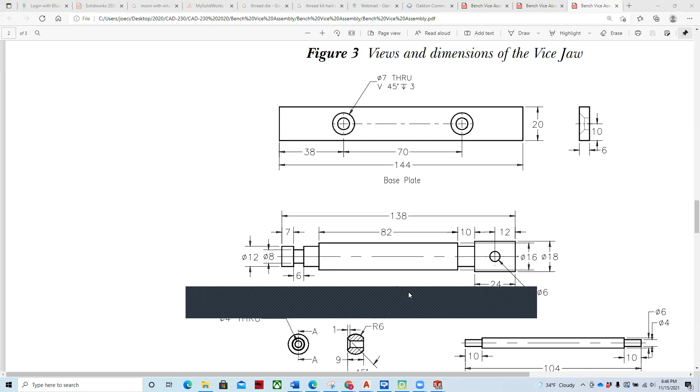Hi, Joe Cerrone, and today we're going to model this jaw screw for our mechanical vice assembly for the bench vice. All right, so as we look at this part, what we're going to do is...

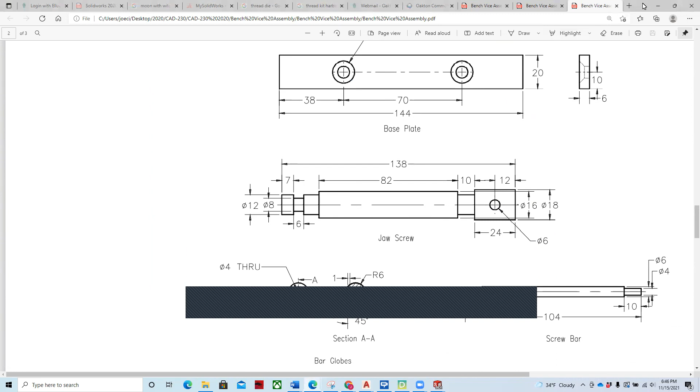We're going to take and create a new part drawing. We're going to use millimeters, and we're going to start by drawing the profile of this shape. So to get started, we're going to go into SolidWorks.

I'm going to start a new part drawing, and I'll say OK to that. I like to change the background so that it's plain white. Then I'm going to start on the front plane, creating a sketch of the profile of this component right here.

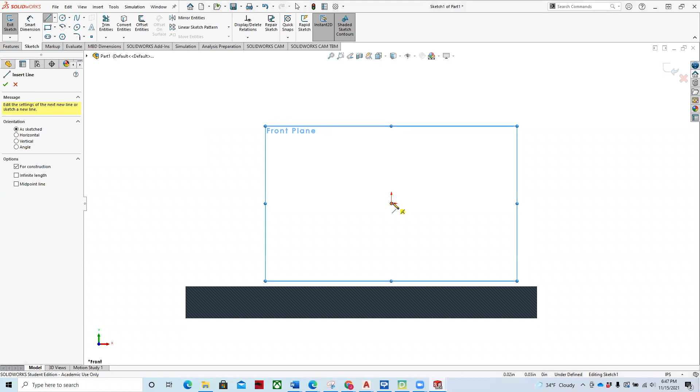I think I'll set it up so that I'll draw a center line from this point right here and bring that out. Before I get started, let's make sure the units are properly set, so we want millimeters. Then let's do that again.

Start a sketch, center line. As we bring that out, we'll bring that out to about 140. Close enough. Then as we start to work on creating the shape of this, there's a couple different ways. We could use the cake method, where we stack cylinders up, or we can just draw the profile of it and revolve it.

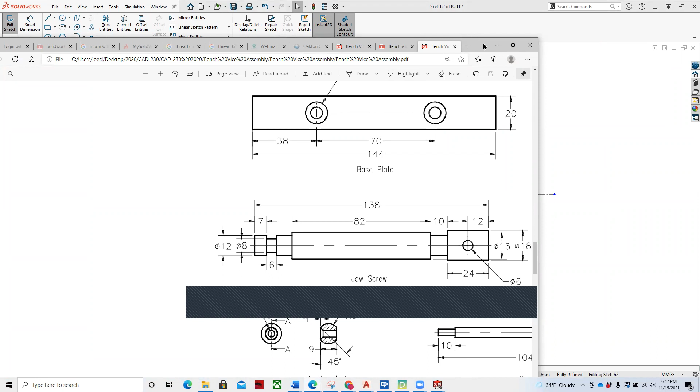I'm going to just draw the profile of it and revolve it. So we'll start off by drawing the basic shape. We'll come up here and bring this up - this is going to be about 6. Then we'll bring this over, bring this down, zoom in a little bit. This one's going to be even with that.

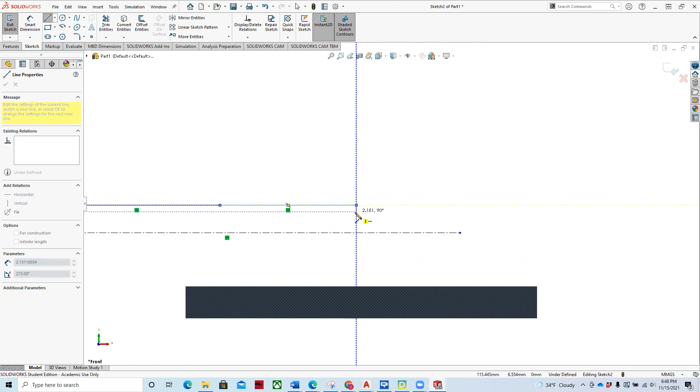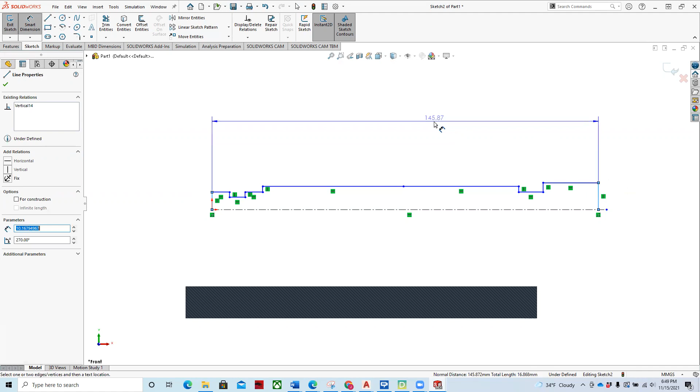Once we have our basic shape created, we're going to start to add some dimensions to that using smart dimensions. We'll start off by making the overall 138, so we'll come over here and here. Then we'll add the other components.

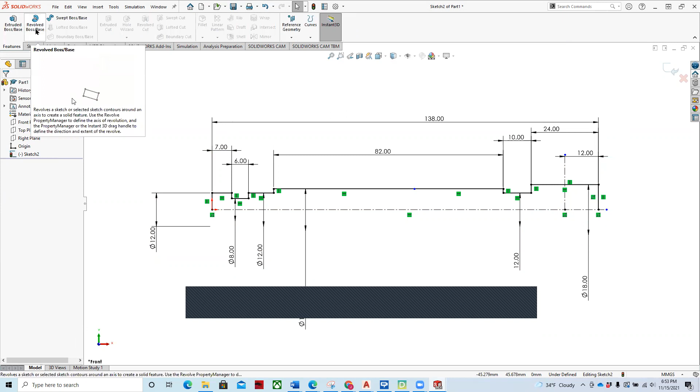All right, so we're fully defined, we have our components there. I also like to put a little holding place in here for where the hole is going to be, so I'm going to locate that 12 millimeters with a smart dimension from the edge, so I'll be able to use that component to grab onto to create the hole geometry.

Next thing we're going to do is revolve this. We'll go to features, revolve, say yes, and then we'll say our axis is going to be right here. Green check mark that. So here's our basic shape for that.

Then if we want to, we can go and sketch on the top plane, spacebar, normal to, and then create center mark, and we can create that circular geometry on that. We'll make that a 6 millimeter diameter. Green check mark that, locate that.

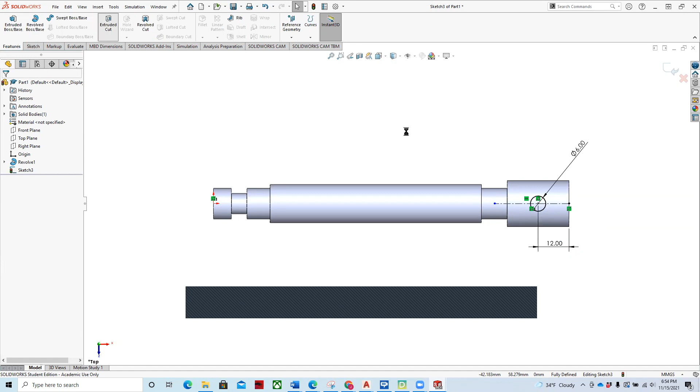I meant to do that from the sketch, but it didn't quite work out, so we'll just go through and do it this way. That's going to be 12. Then we'll extrude cut, through all both, and we'll green check mark that.

As we look at the component itself, what we can do is add threads to this using the threading tool. We're going to set that up with the threading aspect of M16 by 1.5. So we'll come back here - let's save it in case it explodes on us.

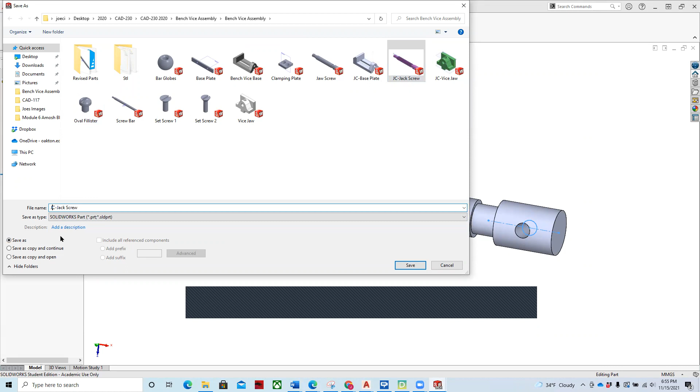We've got most of our modeling work done. I'm going to save it as - now I have my middle initial as I do these more than once. Save it. All right, so to go through and add the threads to it, let's make it a little bit more interesting - let's put a little color on it.

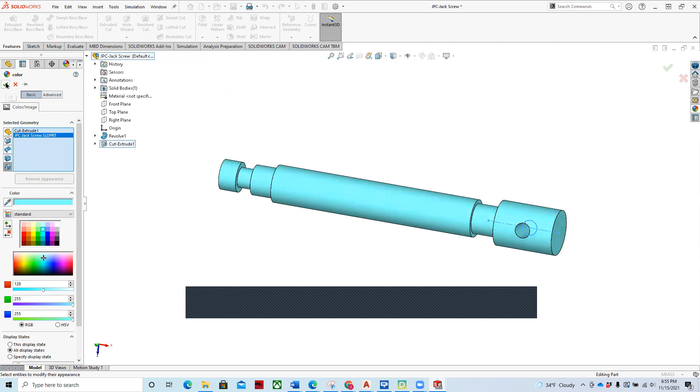I think we'll make it light blue. Then as we work with the threading tool, we're going to go under the hole wizard and say thread. It did explode on me last time, so hopefully it will work for me this time.

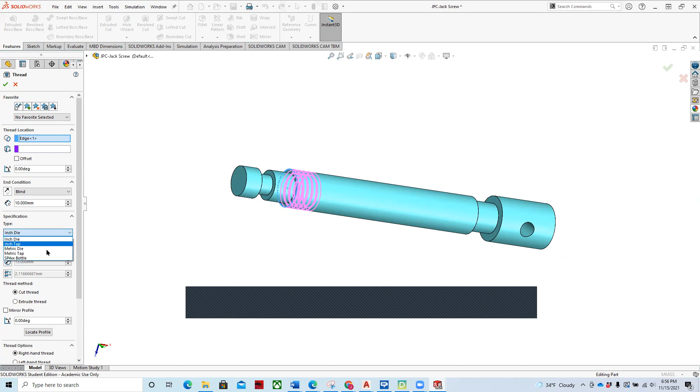Then what I'm going to do is select the edge of it right here, and I'm going to set that up as a metric die. So I'll say metric die, and then I'm going to say...

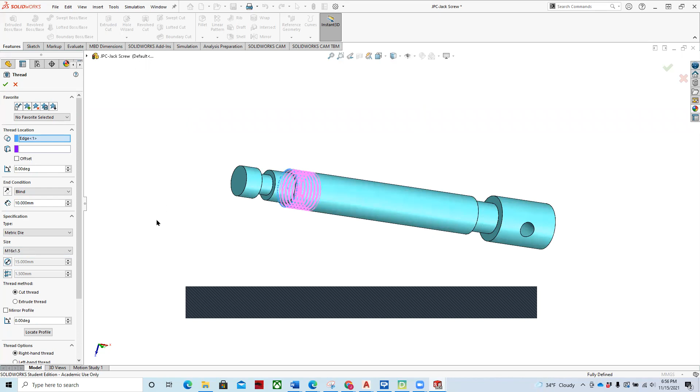M1.6... and M16, 1.5. There we go, so there's our thread.

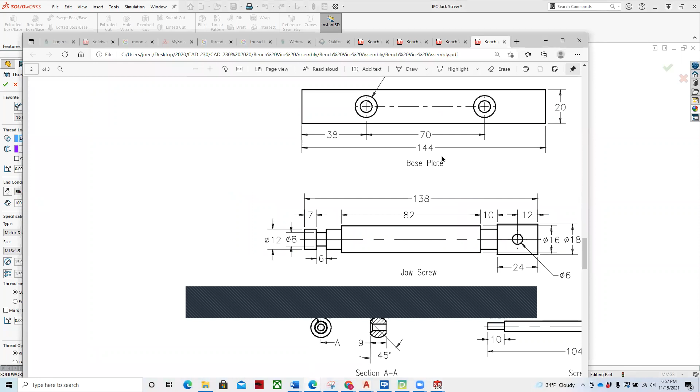Then we can make the distance for that - we can just start to increase that until we reach - and that's a little bit too far. If I look at the PDF for that, we're going to have it at 82, and we'll probably make it a little bit longer, and then we'll offset it.

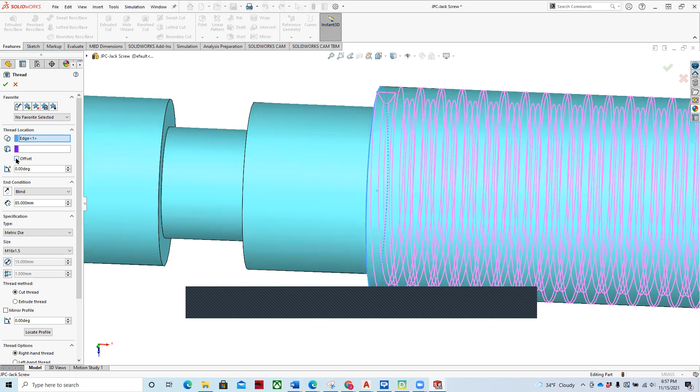So let's just make it 85. Then what we want to do is offset it so that the threads actually have some bite, so otherwise we won't be able to put the component onto the thread. So we want to add a slight offset here, and we're going to reverse that the other direction.

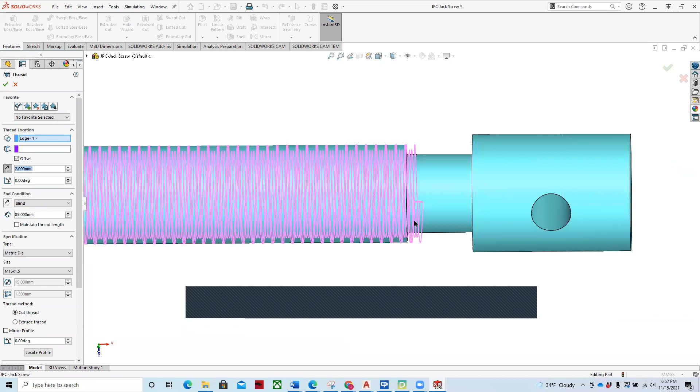Perfect, and then as we look at that, that'll give us enough to give us a thread. We may want to go - let's just go with 2, just to be safe enough that we get an entire thread on it. We want to make sure we're over on this end too. Green check mark it. And that's our thread, and we can then 3D print that as well.

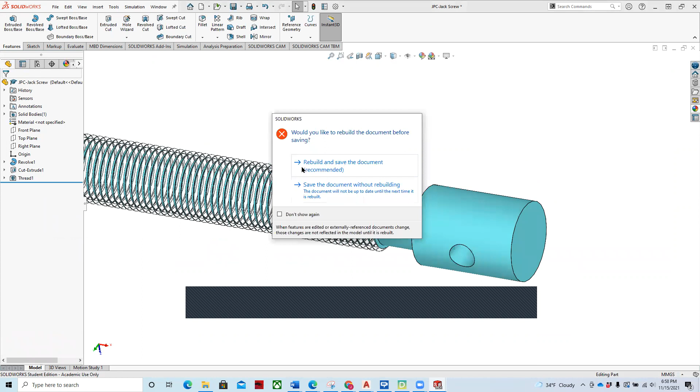We'll save this, and I'll just save it again as my jack screw. Save. Yes. And we'll rebuild this document. All right, so that's our jack screw.

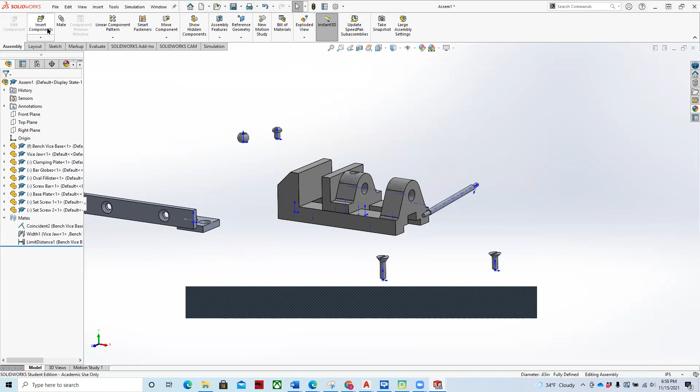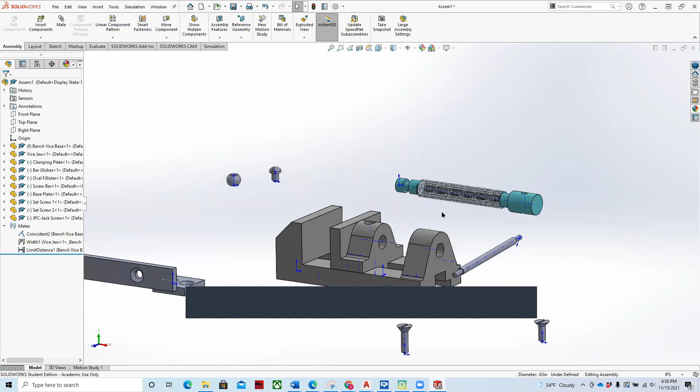If we want to go back to the assembly drawing, we can then bring it into this assembly. If I go and take this one out, and then we go and insert that component, we can go through and start to create the mates for creating that part.